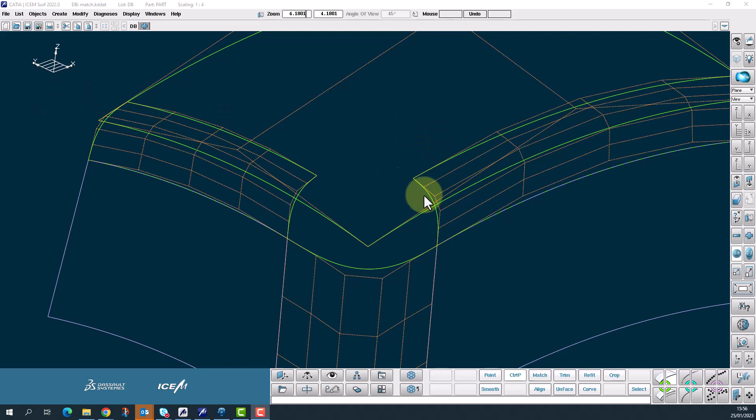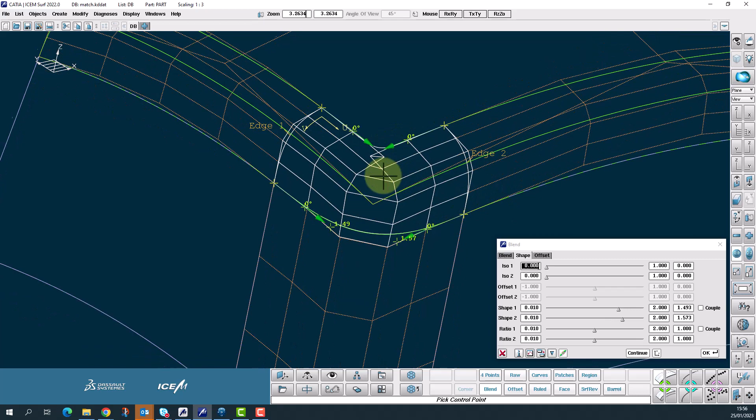Alright, let's go straight for a blend. I'm going to choose a blend surface, and blend from here to here, just as a first shot. Remember, I can grab these handles to nudge it in a little, so you can see where it's crossing over a little on that side. So maybe I want to manually pull that back there and pull that back. I can tidy that up later, I'm just getting myself to a good starting place.

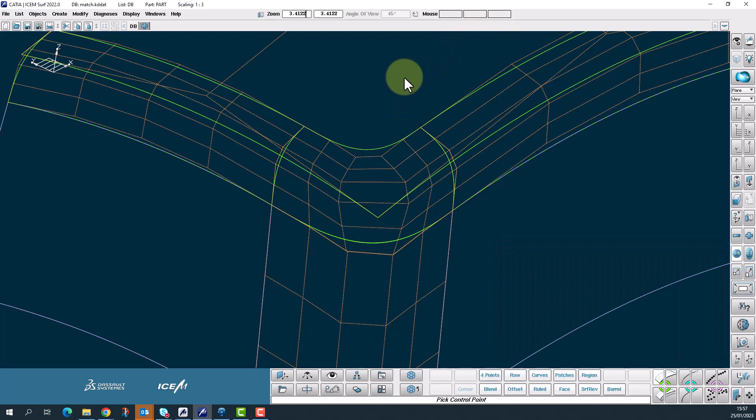That'll do. Now I'm going to use the new mouse menu where I can use the right mouse button to exit a command. Now I'm going back into my mouse menu and going for matching, and this is where we can speed some things up.

So if I click near this edge right here, it picks the edge and the reference in one click. The reference is in blue, the patch I'm modifying is in white. And what we want to do is just go for OK.

I could go over here and push OK, but again using the new mouse menu, if I hold - for me on my keyboard it's the backslash button, the one next to shift under my left hand - there we go, we've got select, OK, and exit. So if I hit the middle mouse button, it's the same as pushing OK here. So if I push OK, there we go.

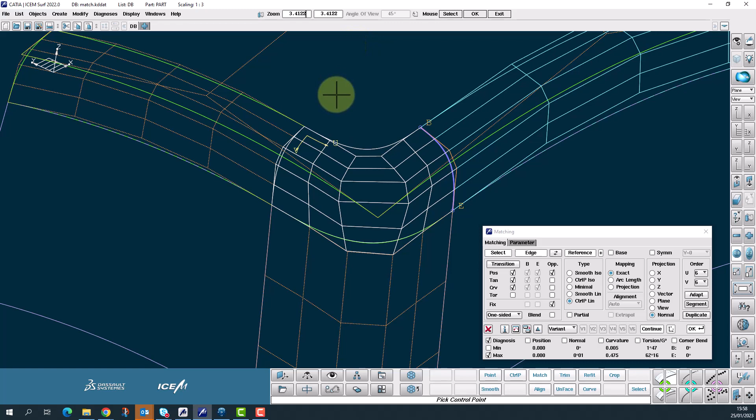So if I want to do the other side, I can let go and repress, and with the left mouse button I need to do a double click - the first deselects, the second reselects. So that's now selected, then I push it again, and the middle mouse button does it. And again down at the bottom, I push the button, go 1, 2, then hold it again and go middle.

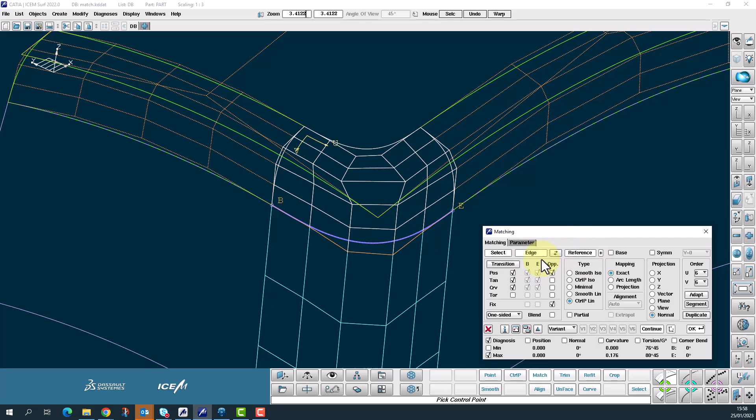So it's not quite the same as having a shortcut on the reference and the edge. We cannot do this - we don't have the ability to do that yet, but this is getting close.

But here we have a messy looking thing, so let me just tidy that up a little bit. I'm going to drop into matching and show you something maybe you don't know, something you've not seen before.

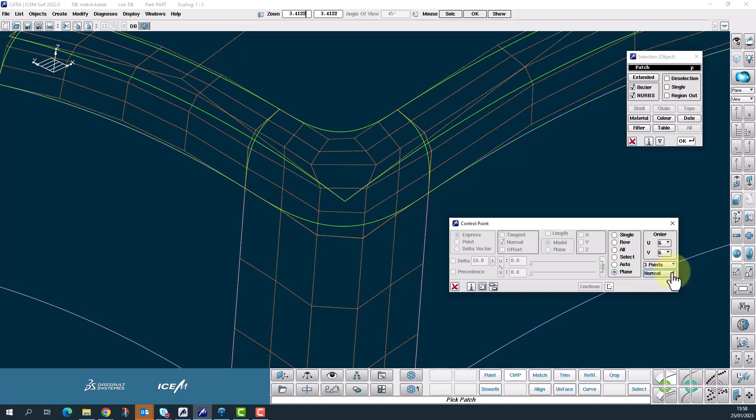So again, I'm going to go into control point manipulation, and use the plane with the 3-point option. I'm going to work on this patch, and you can see I've been practicing already. What happens with the 3-point option is it's going to align the control points to a plane based on these things.

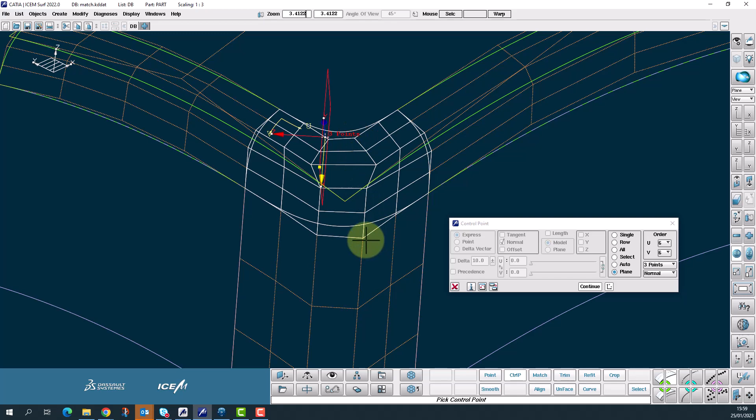So we have trace, 3-point, approximate, and free. 3-point means it's going to fit a plane through the first control point, the last control point, and the control point I pick. So if I carefully pick here - see what happened? It automatically put all these control points on a plane.

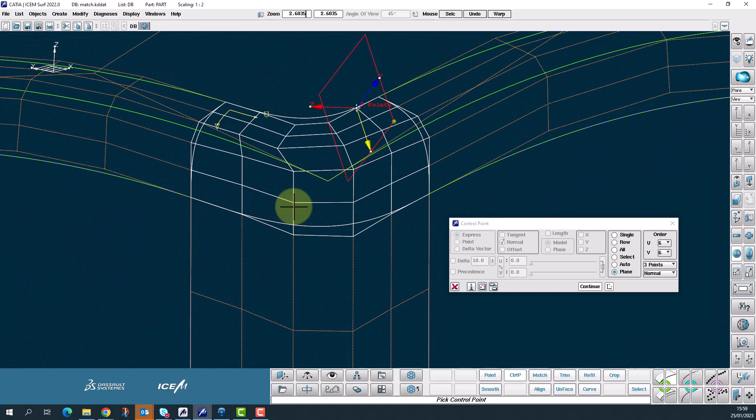And if I do that again on this one - so if I pick, I'm picking this row, and if I pick close enough to this control point, this will be the third point of the 3 points that the plane goes through. So if I pick here, watch what happens. There you go. It's a kind of quick control point alignment that works off of a plane, rather than having to manually do it.

And there we go. So I'm not saying it's a perfect fillet, but it's not too bad. And there we are. I hope that helps.